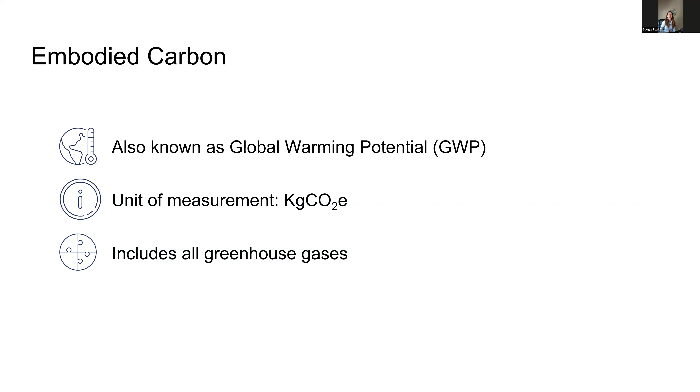Within embodied carbon, we report in different life cycle stages. So this GWP value, global warming potential, can be from the product stage, from construction, usage, or the end of life. And there's another stage that is beyond the end of life, normally reported separately.

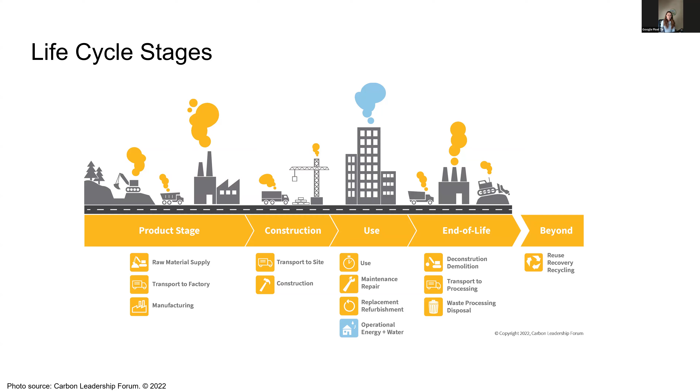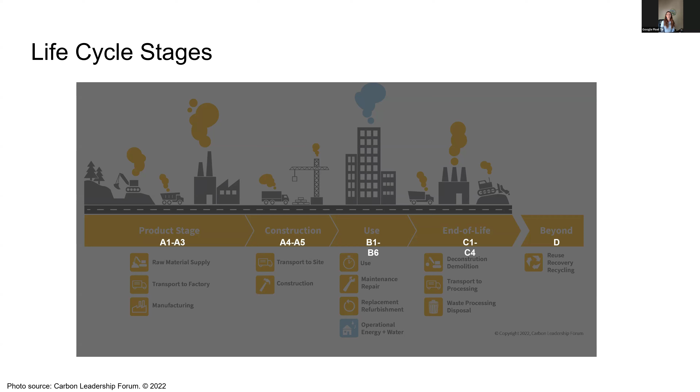If we go to how things are called based on the modules included in each life cycle stage, it is A1 through A3 for product stage, A4 through A5 for construction, B1 through B6 for use, and the end of life is normally C1 through C4. Module D, as I mentioned, is normally reported separately because it can overlap with some of the end of life modules.

Important to know that life cycle stages A1 through A3 for product stage, and there's a few animations on this, is what is called the system boundary, cradle to gate. So for those of you who have heard this before, cradle to gate is pretty much from when the raw material is extracted to the end of manufacturing.

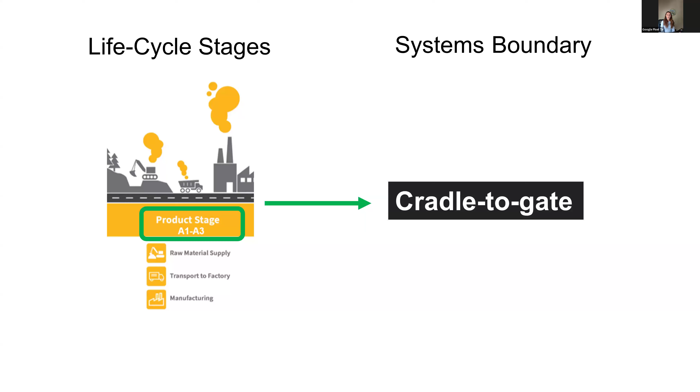The same for additional life cycle stages. If we include all the way through the end of life, that's what is normally called cradle to grave. So that system boundary is cradle to grave and includes life cycle stages A1 through C4.

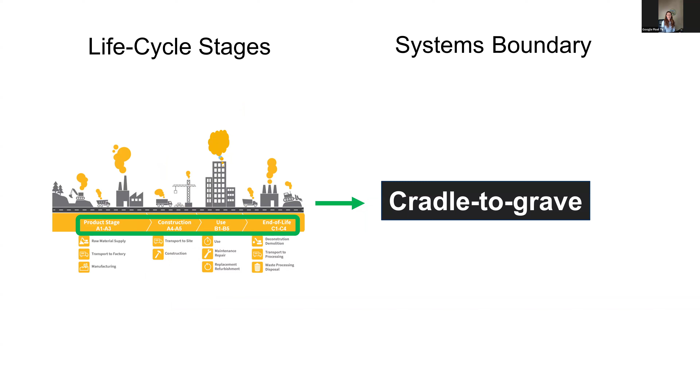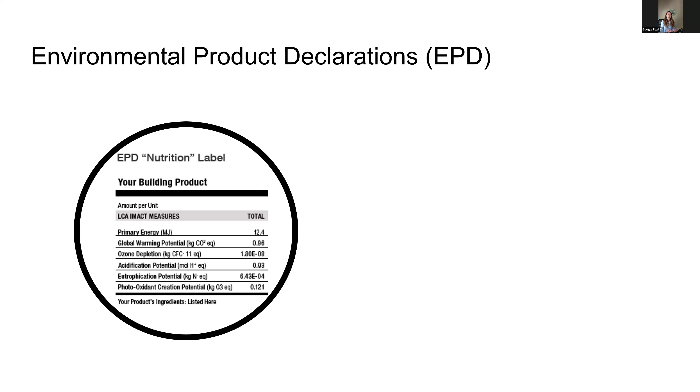How do we know what the global warming potential value of a product is, what the number is? It comes in an environmental product declaration. This is a document that includes a nutritional label with not just the global warming potential, but also different environmental impact categories.

In order for us to be able to compare a product against another product, there are certain things we need to make sure are the same. The declared unit will be one, so we need to make sure we have the same unit for comparison.

We will want to know if this is product specific or industry wide. The difference is that the industry wide EPD includes data from different manufacturers that are part of a certain association, for example the Steel Association, while a product specific EPD is specific to a manufacturer and that product's manufacturing process.

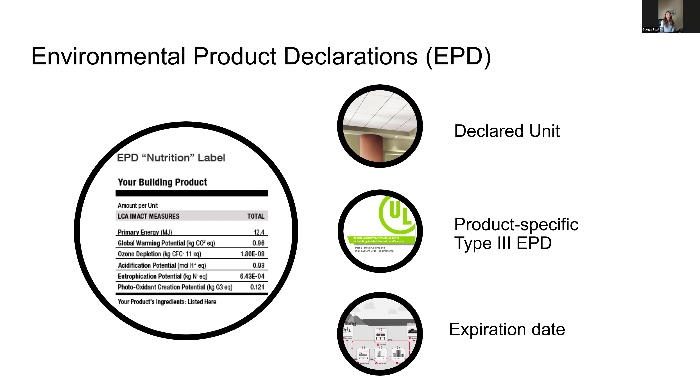Type 3 EPD means that it has been externally verified. It is important to know if it is externally verified, because for many compliance paths and regulatory mandates across the nation you will need a Type 3 EPD. The expiration date is also very important, to know that it has not expired. And we want to know that value, the GWP.

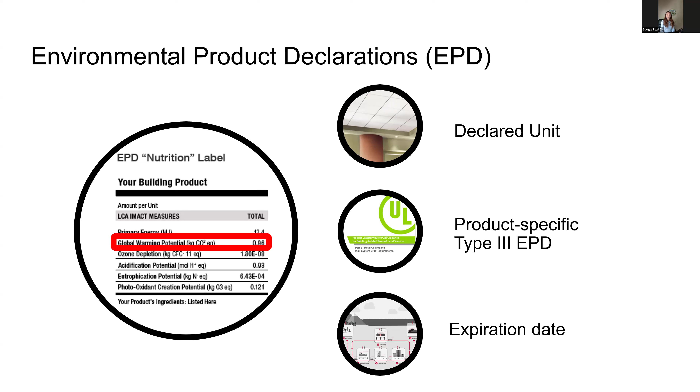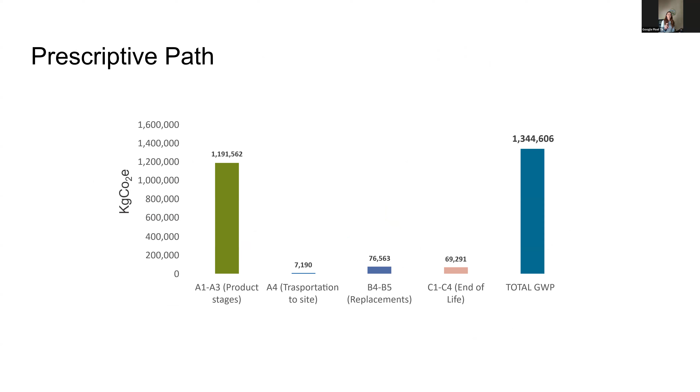When we compare different ways for compliance for embodied carbon reductions, we have the prescriptive path, for example, meaning A1 through A3. A1 through A3 has the highest impact on all life cycle stages for the most part, unless you have building reuse or mass timber where it will be reduced, but it still will be the biggest chunk of the total whole building LCA. That's why the prescriptive path exists.

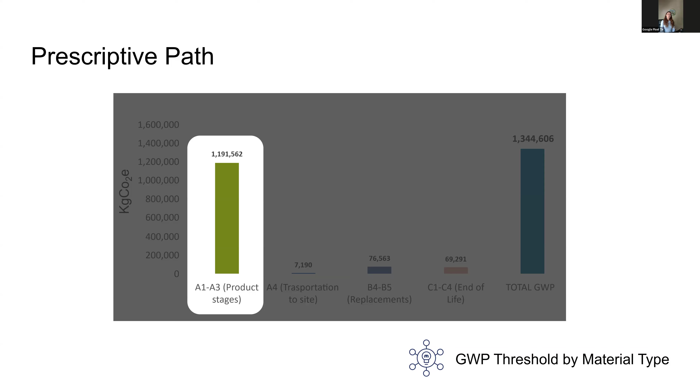Next, which includes regulations from different states, and this has been called Buy Clean. This is representing different states who have passed Buy Clean state policy, and as you can see there's some in different colors.

The yellow includes building and infrastructure. The orange includes only infrastructure. The blue is only buildings. And then there are some states that have introduced the bills but have not passed them yet.

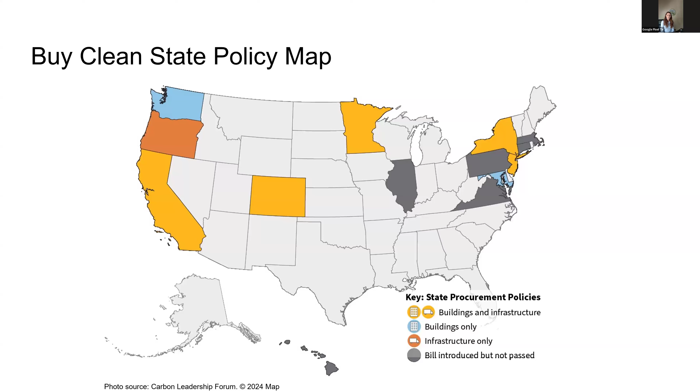However, a Rocky Mountain Institute study completed for federal projects, if you look at the darker blue line at the bottom, it will get to zero, but the line above it will not get to zero by 2040.

That represents only the Buy Clean policy. So only the prescriptive path will not get us to zero by 2040. If we want to accomplish that, we will have to include whole building life cycle assessment into the equation.

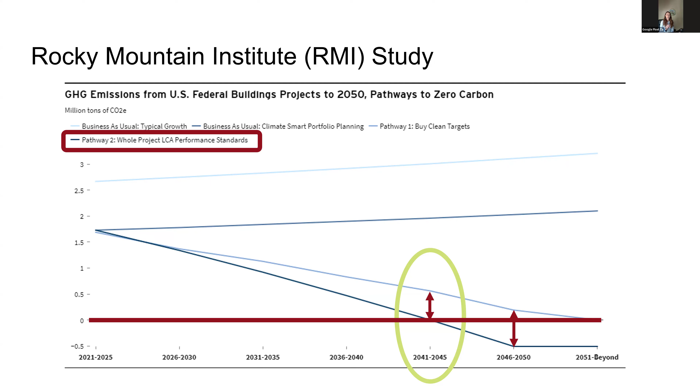That is when we include A1 through C4. So that will be the whole building life cycle assessment.

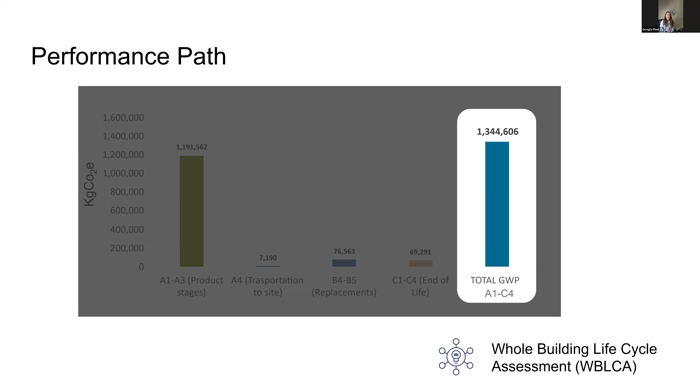The only state currently that has included requirements for embodied carbon reductions is through the code CALGreen in California, and it has three different options to meet the requirements: building reuse, life cycle assessment or life cycle analysis, and the prescriptive path. So this is currently the only state and code in the country that includes those requirements.

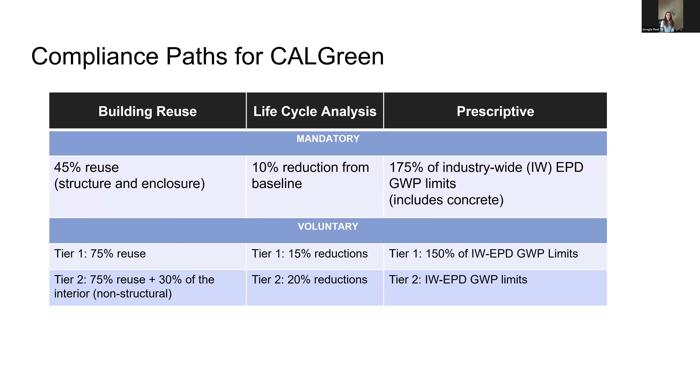So we have discussed two different ways for embodied carbon reductions included in different codes and regulations: the prescriptive path and the performance path. However, when you're doing the performance path, there's always a comparison to a baseline, and that can be a little subjective because not everybody creates baselines the same way. It's not as straightforward as the ASHRAE 90.1 guidance for energy.

So what all practitioners are trying to accomplish is to determine an embodied carbon intensity, which is kilograms of CO2 per square meter of your building. It is similar, for those familiar, to an EUI, energy use intensity. That is what we are trying to accomplish.

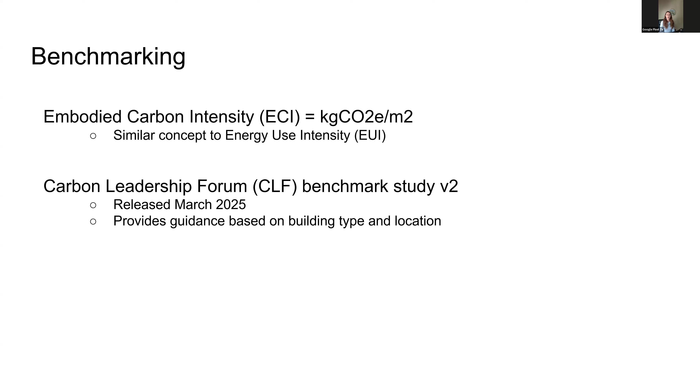The Carbon Leadership Forum benchmark study version 2, recently released in March of 2025, includes around 500 buildings across the nation. Yes, it's not a very comprehensive data set, but it is at least something, the best that we have at this moment. It includes building typology and locations, based on the scope included in your analysis. So if you include only structural and enclosure, you will have different results than if you have structural, enclosure, interiors, or even MEP or hardscape. They are separated by life cycle stages, by building type, and by location.

So how these apply to what the LEED V5 and embodied carbon requirements are coming.

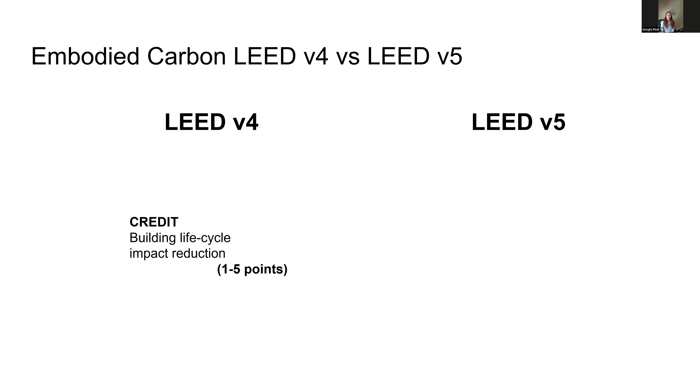The embodied carbon in LEED V4 was only one credit, and it was optional. You didn't need to use it if you didn't want it. Now that credit has been broken down into several categories in LEED V5. We have the prerequisite, which includes assessing and quantifying the embodied carbon, and I'll cover more detail on what's included. Then there's the building and material reuse credit, and the reduced embodied carbon credit itself. So from 5 points maximum, we are now at 9 points maximum plus one prerequisite.

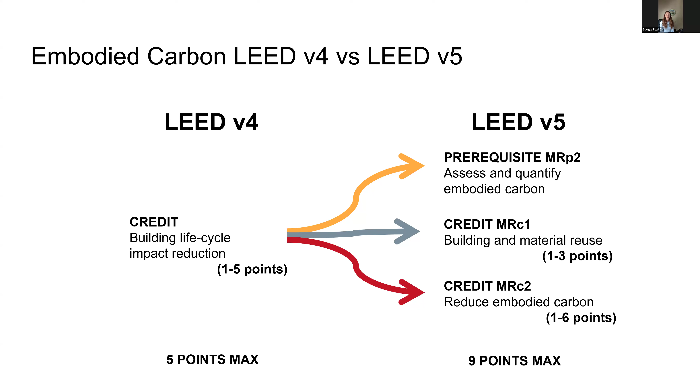One of the new prerequisites not mentioned in the previous slide includes a portion of the assessment for embodied carbon: the carbon assessment, which is a 25-year projection for the following prerequisites: operational carbon, refrigerants, embodied carbon, and optionally transportation demand management, which is a credit instead of a prerequisite but can be included.

All emissions need to be reported per square foot. As I mentioned, embodied carbon intensity is normally reported in international units, but since we're in the US, USGBC is requesting it in square footage. For this 25-year projection, when the prerequisite was released for public comment, they were requesting all teams to provide the 25-year projection themselves. Now you will provide the information for each prerequisite, and USGBC will put all the information together and report back to the team with this 25-year projection.

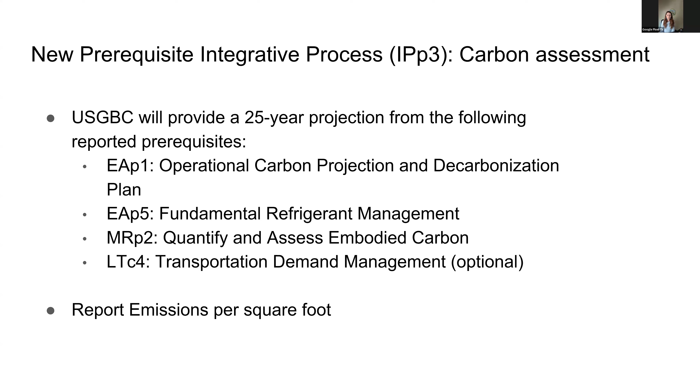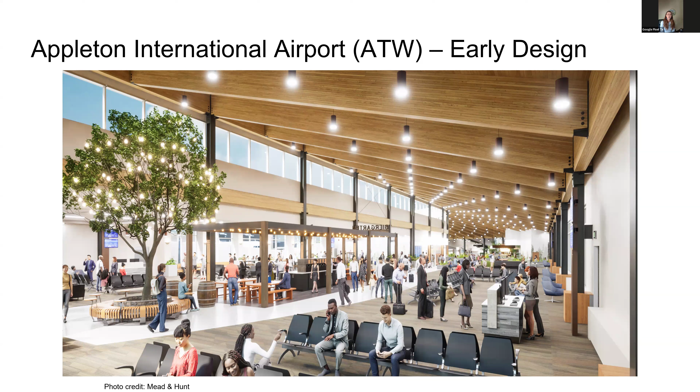One of the examples we've done at Mead and Hunt is the Appleton International Airport. This was during early design, and we completed an assessment for all the prerequisites for LEED V5.

So for our 25-year forecast emissions projections at ATW, as you can see, the highest emissions come from embodied carbon in the first year of operations. After 20 years, there will also be some replacements for enclosure materials related to embodied carbon, and the assumption of equipment being replaced. Of course, equipment doesn't get replaced all at once in the same year, but for the purpose of the exercise, we assume everything gets replaced at 20 years based on manufacturer's guidance. That is the peak on the refrigerant emissions.

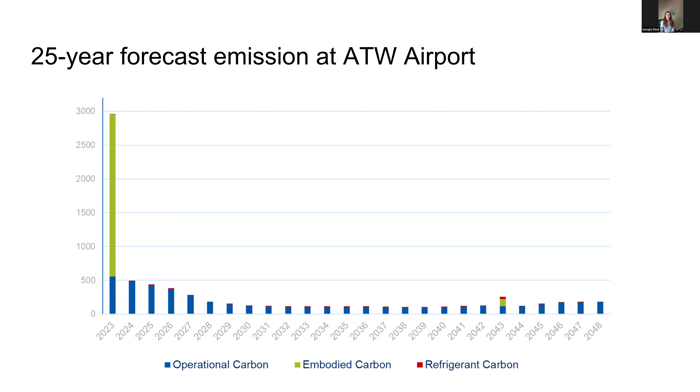The prerequisites within the material and resources category include assess and quantify embodied carbon. The difference from the previous version of LEED is that now we want to include hardscape as well. Before, only structure and enclosure were required, but now hardscape is also included. You can do this using software or manually, but you'll need the quantity of each material in the structure, enclosure, and hardscape, and multiply it by the GWP value, only through the product stages, A1 through A3. The goal of this prerequisite is identifying the highest, high-priority materials.

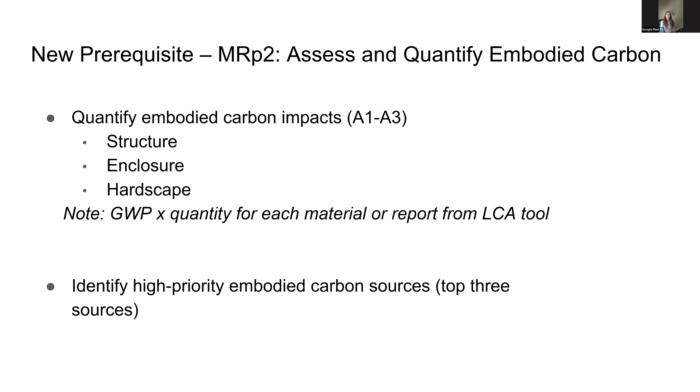This makes sense as to why they determined A1 through A3 only, because for most projects that is the highest impact we have. For example, this is also from the ATW project.

We used One Click LCA to complete the whole building life cycle assessment. The prerequisite and all the credits have different paths you can follow if you want to achieve reductions, or just complete the assessments. However, using a whole building LCA tool will allow you to comply with all the prerequisites and credits, and accomplish the highest amount of points. With the whole building LCA, we found that the biggest impacts came from steel, concrete, and insulation for this project.

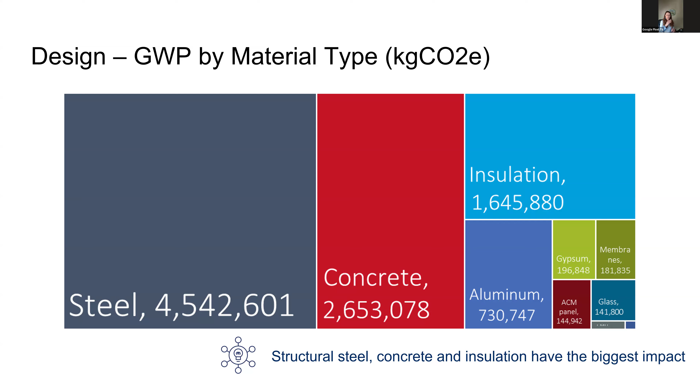So going to the credit now, the building and material reuse, and it is broken in two parts. One is if you reuse a whole building or portions of the building, and the other one also gives points or credit to design teams that include any deconstruction goals into the design goals and achieve them by deconstructing the building and having those materials salvaged or reused in another project, or you can also reuse or salvage in your project from other projects externally.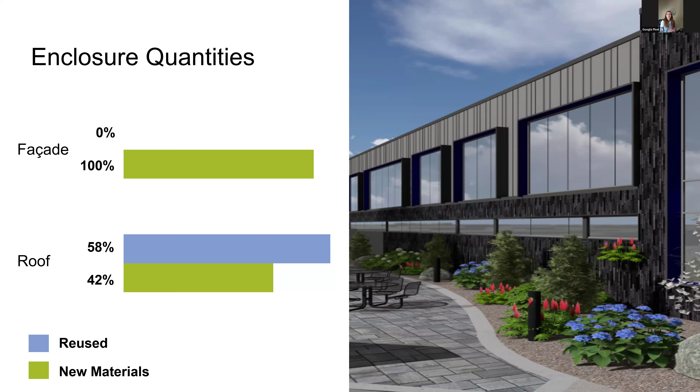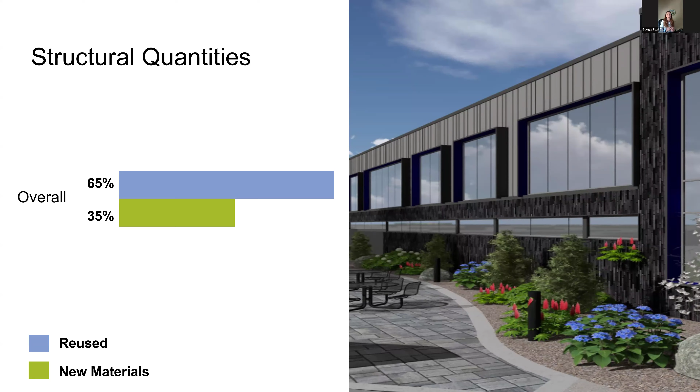And the structural quantities overall, 65% will be reused and 35% is new materials. And for the facade, there are portions of the facade that are structural walls. So you have to determine where you're going to put them, in your structural or in your enclosure; it cannot be in both. So we determined to put it in the structural quantities.

This project is pursuing version 4.1, not V5 yet. But the benefit of doing a whole building LCA, even if you know that you're going to have a building reuse, is maximizing the amount of points that you can get, combining the two options, plus exemplary performance that for this project we were able to achieve as well. So the global warming potential reductions were over 38%, and over all the other impact categories more than 10%.

So we are able to get close to maximizing the amount of points. We're not at the 40%, but between the reuse and the new construction. And I have a slide that will show that later.

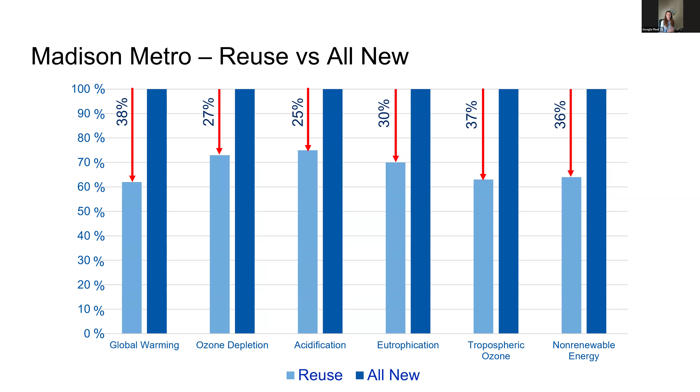Next. So the credit for reducing embodied carbon has up to 6 points, and there are different pathways to meet the requirements. There's option 1, the whole building LCA, which gives you the maximum amount of points. And as you can see, even doing just the whole building LCA will give you more points than if you do the prescriptive path doing EPDs only.

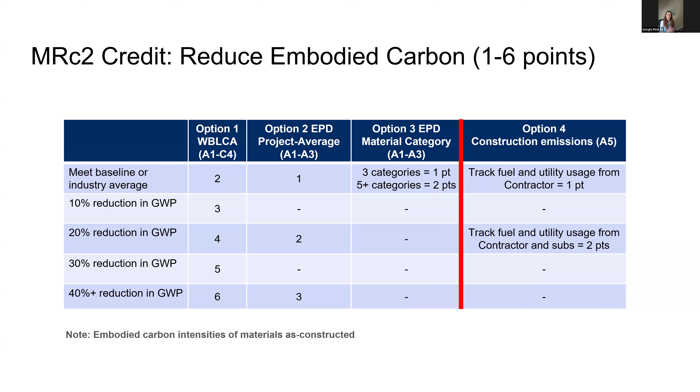And for option 4, I want to mention we have Mark with us today, and he will cover the contractor side of things. But the most exciting thing about this new version of the rating system is that now it will also incentivize projects to track and report A5 emissions, which are the construction site emissions. Next.

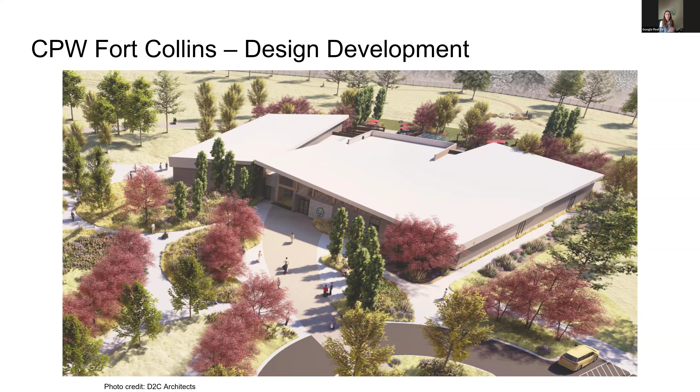So a case study for the whole building LCA. Again, all these projects are not pursuing LEED V5 yet, unfortunately, but version 4.1. This was completed during design development. The architect is D2C Architects, and thank you for the rendering.

Next, please. And for CPW Fort Collins, at the beginning of the project there was a discussion of using steel or mass timber. It is a one-story building; they have some high ceilings in some areas. So the project decided to follow through with mass timber, but this was an analysis during schematic design. And as you can see, we were able to achieve 38% reductions.

And this is not including any biogenic carbon. For LEED documentation, you cannot get credit for using biogenic carbon. But if you add that biogenic carbon, the global warming potential will be reduced even further. Next.

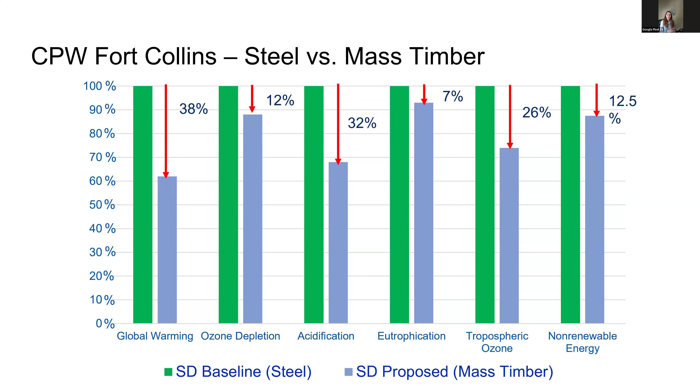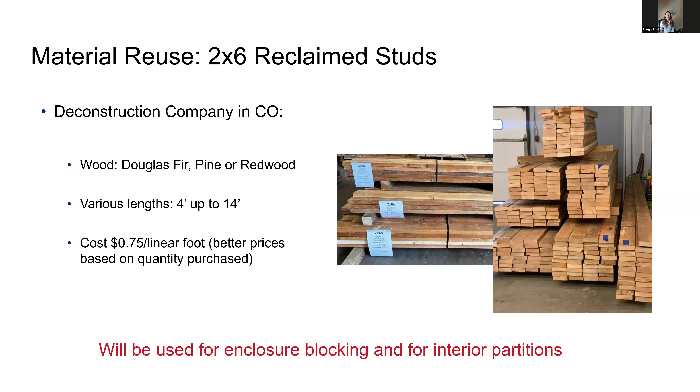One of the exciting things for this project too is that we had early discussions to incorporate material reuse. And although it is a little bit more complicated because of visual grading of the studs to be used in a building enclosure for structural purposes, we are going to use it for interior partitions and also for the blocking of the enclosure. Next.

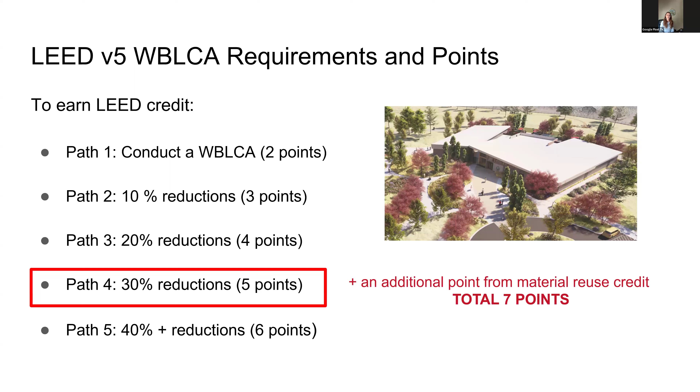And then back to the Madison project, if we were to pursue this project under LEED V5, click next, Marisol, thank you. It was 38%. We were close to the 40, but not there. But we can combine different options. So different options, now different credits to maximize the amount of points. And here we will get 5 points for path 4 over 30% reductions and 3 points under the building reuse. So a total of 8 points.

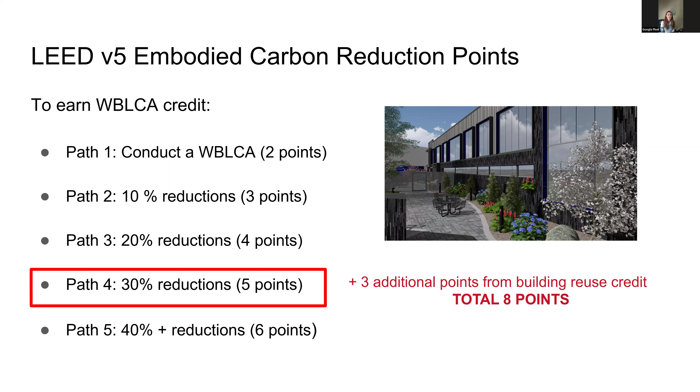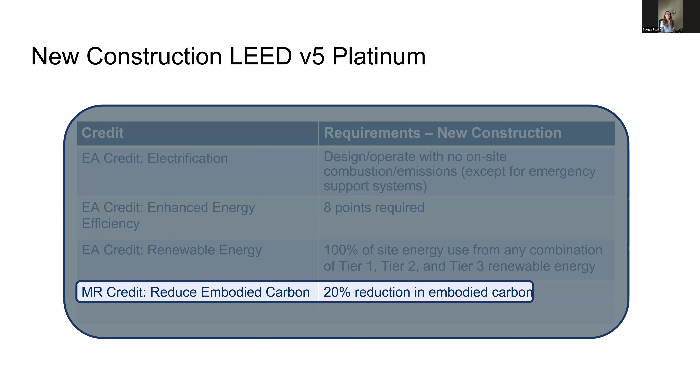So you can see how the decarbonization or the embodied carbon reductions play a big role now on LEED V5, and utilizing tools as whole building LCA, it will maximize the amount of points that your project can achieve. Next, please. One thing very important, this is only new construction. The commercial interiors had slightly different requirements for a LEED Platinum. But besides all the energy credits that are required, also for embodied carbon, you need to achieve 20% reductions to be able to achieve LEED Platinum. Next.

And I'm going to pass it now to Mark. Thank you. We're going to talk a little bit about embodied carbon reduction in Colorado. So some of the laws, and Marisol, or I'm sorry, Victoria, please jump in when you want to. So embodied carbon regulations and pathways in Colorado. So you have Buy Clean Colorado, Colorado Model Green Code, Denver Green Code, and then there's a Denver embodied carbon pilot framework, which isn't mandatory at this time. You can see how each one of these regulations, whether it's prescriptive, performance, or reuse.

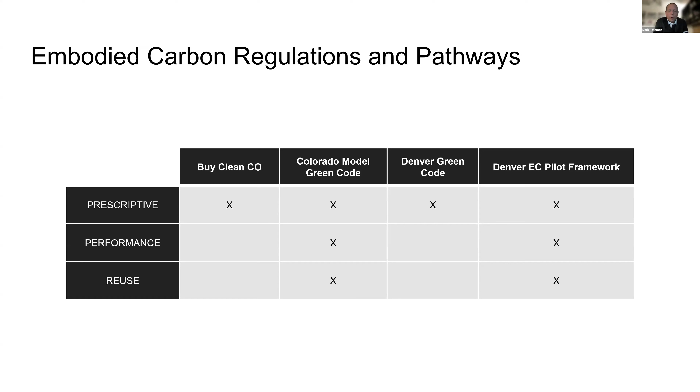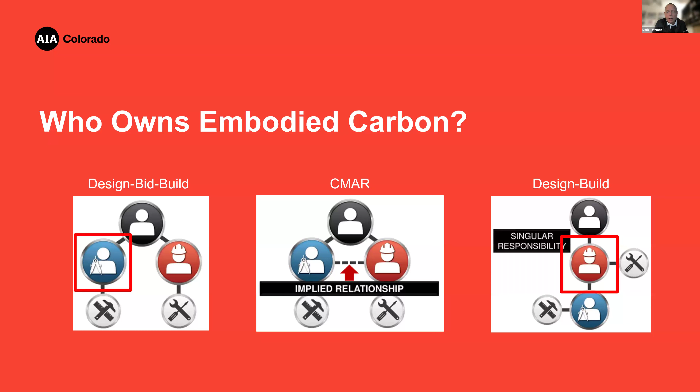And then finally, in design build, the way most design build contracts are written, the requirement for embodied carbon will be captured with the design builder. Now that design builder could potentially pass that along through contracts to the design team, but it still ultimately resides with the design builder. One thing that I recommend from experience is that if you're working with an owner that says they want to reduce embodied carbon, but they don't provide specific targets, I highly recommend specific targets, particularly if there's going to be contract language around reducing embodied carbon. I have a project going right now that did not have specific targets, and it's very difficult to say you're meeting the contract requirements. So highly recommend making sure that the targets are clearly identified. Next slide.

So we've seen this, and I don't want to dwell on it too much. What I'm going to really focus on here is the A4 and the A5. That's the embodied carbon during construction. So A4 is the transportation of materials to the project site, and A5 is the installation of those materials and the resources used to do that. Next slide.

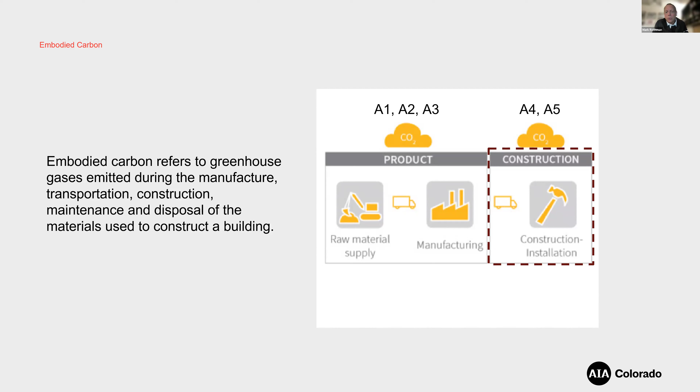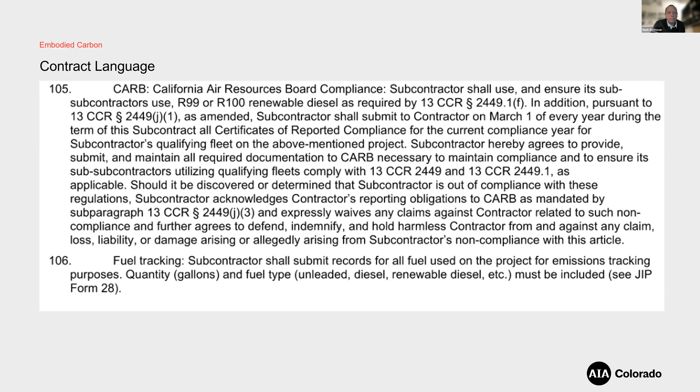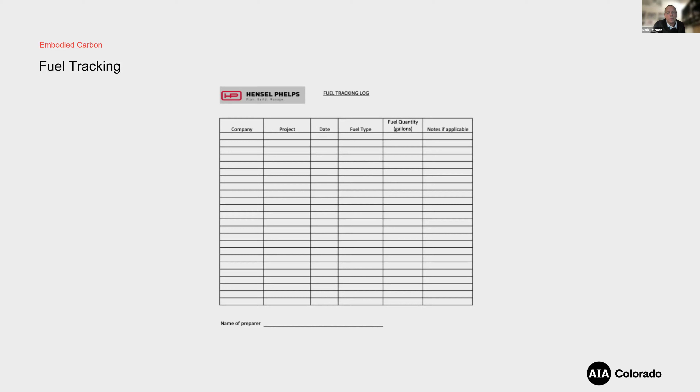And I say that Hensel Phelps will build whatever somebody wants us to build, the most sustainable building to the least sustainable building. And the reason why I say that is we work in multiple jurisdictions all around the country, and the goals that we have set for our company might not align with the goals that some of our clients have. So reducing carbon by 30% is a great goal, but you may have some clients that are not interested in that pursuit. So it's up to the design team and the contractor then to educate those owners and say, look, you can get a 30% reduction in concrete, and it won't cost you any more to do that. That's very easy to achieve on the West Coast. It's less easy to achieve in other regions of the United States, at least at this time.

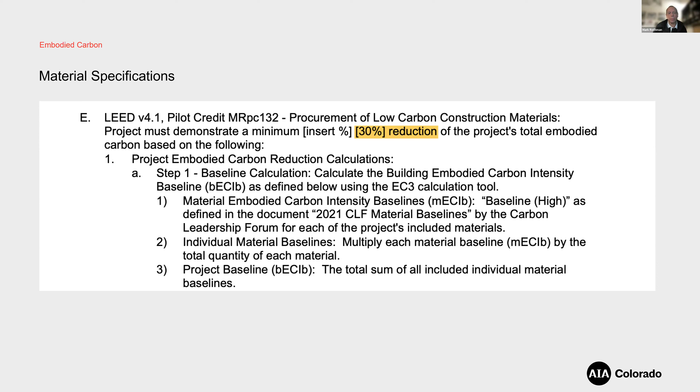The steel fabricator actually told the design team what types of steel they should stay away from, because those would be more problematic to get in a reduced carbon version. But we bought the steel out at 60% drawing, so right around design development when we got the 100% steel spec. Around 90% complete documents, there was a requirement for 30% carbon reduction, and there was a disconnect between the structural engineer of record, located where the project is, and their specification writer, who was not. But we had already bought the steel, so we had to go back and modify the spec to make sure it was compliant with what we'd already purchased.

We have clients that only want to talk about certain concrete mixes, not all of the concrete, just certain mixes. So it really makes the process inefficient if you're not looking at the whole building. If you can look at the whole building, that's great.

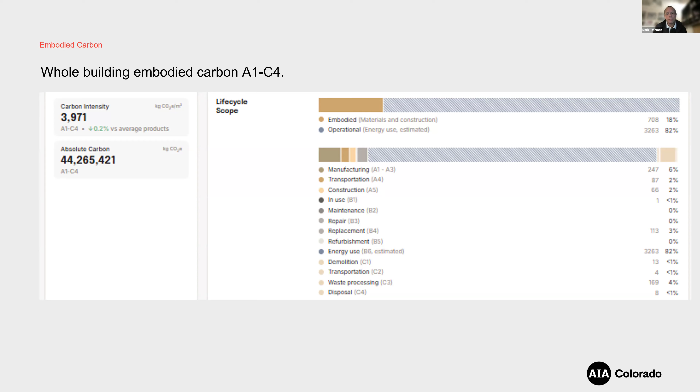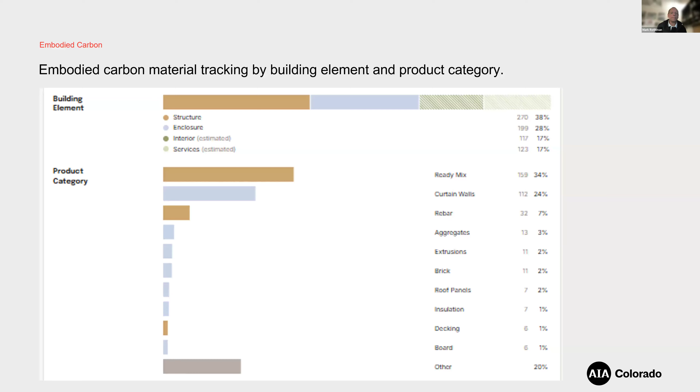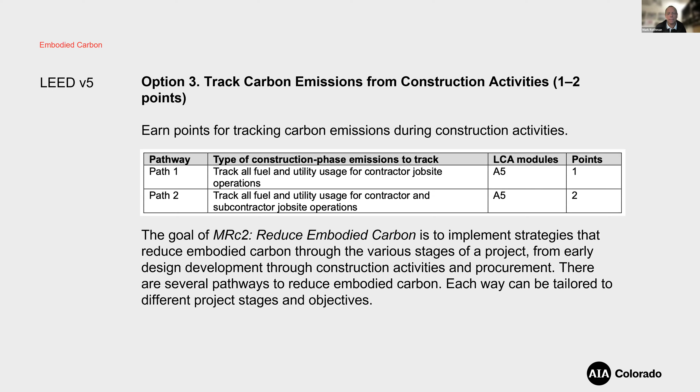For instance, the California law, and if Colorado had passed it, we would have to report at the enterprise level, not at the project level. But this information at the project level, if I was working with a client that is reporting their data, I would report this data to the client. It's scope 3 data, and they would be able to do, whether it's GRESB or CDP or something like that, add this information to their report out.

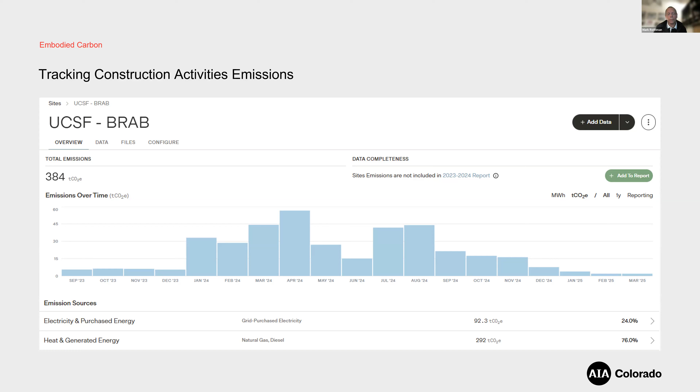And that's it, it's our last slide. So we're open for questions.